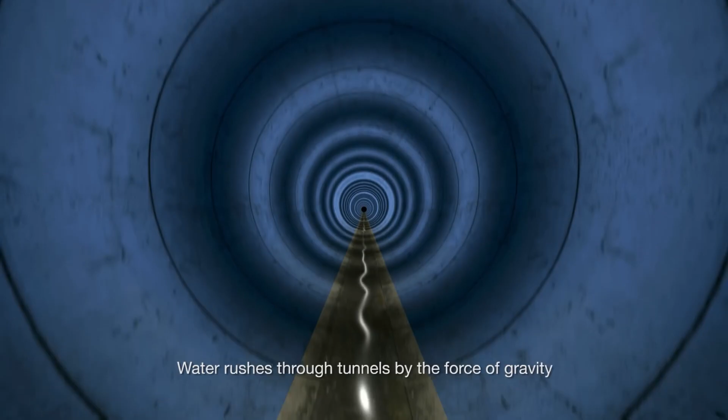The National Water Agency of Singapore (PUB) came up with the idea for the Deep Tunnel Sewerage System, DTSS, more than 20 years ago. It is a motorway for spent water that is vital to a small city-state with a growing urban population.

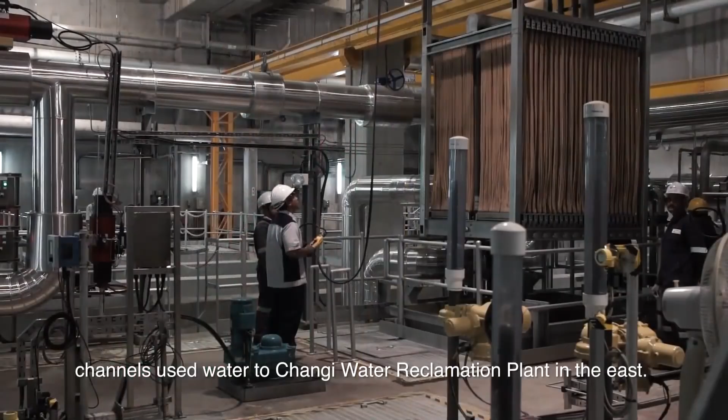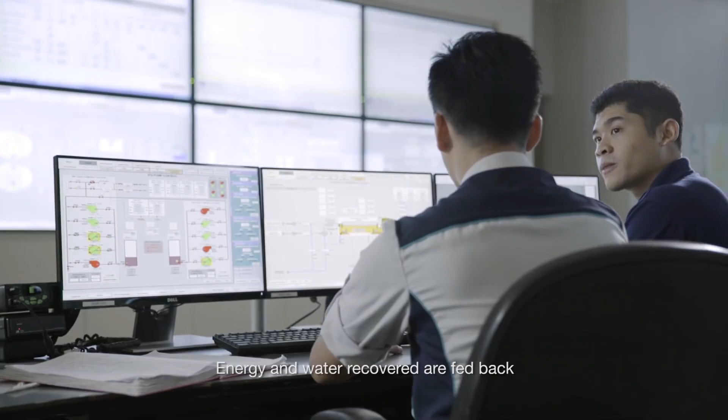In order to meet Singapore's long-term demands for used water collection, treatment, reclamation, and disposal, it captures water from residential blocks, commercial premises, and industrial estates and recycles it. With a network of tunnels, pipelines, water reclamation facilities, and ocean outfalls, Singapore's Deep Tunnel Sewerage System, DTSS, would entirely replace the sewerage infrastructure of the tiny island nation.

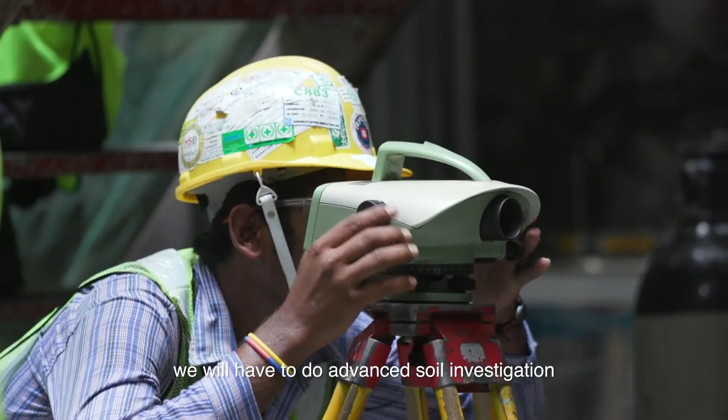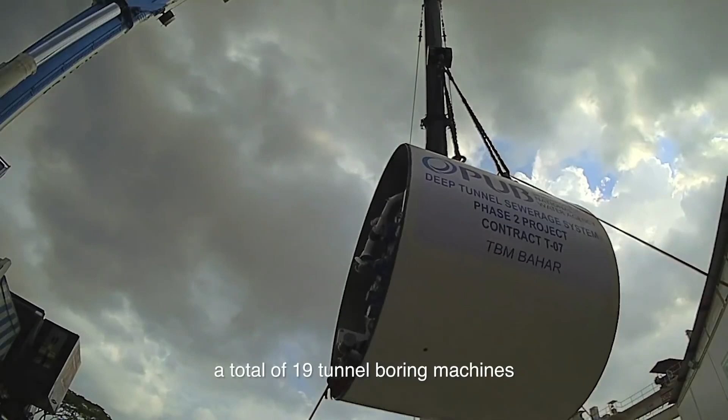The $3.65 billion DTSS, one of the most comprehensive wastewater management initiatives ever, will enable Singapore to accommodate an anticipated population expansion from 4.5 million to 5.5 million, reuse wastewater in useful ways, and rebuild land no longer required for sewerage works. WSP performed conceptual engineering, preliminary design, and program construction management services for the project on behalf of the Public Utilities Board (PUB) of Singapore.

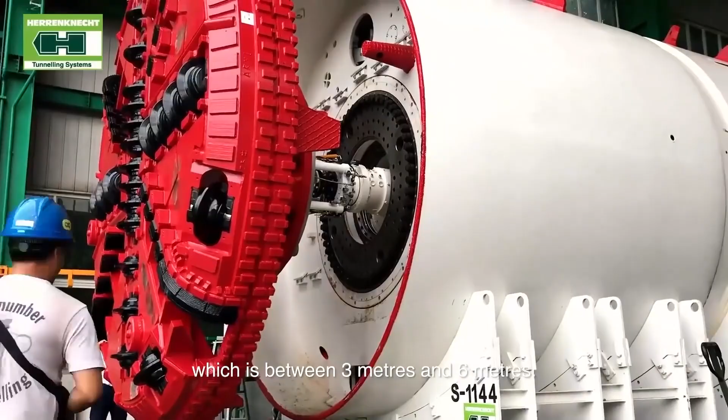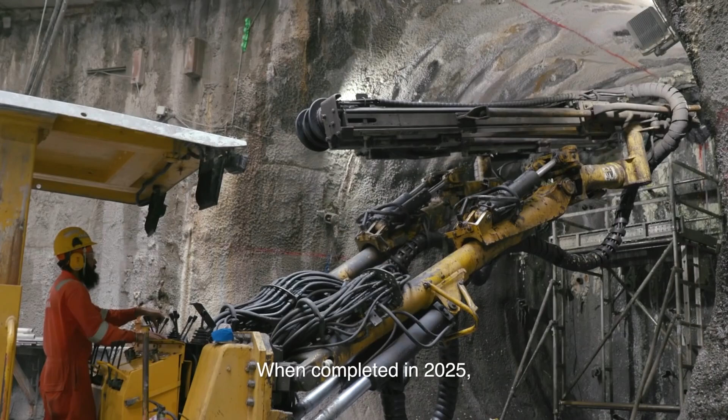The entire new wastewater infrastructure, including the north and south systems, was conceptually and formally designed by the joint venture. For the north system, which was finished in 2008, WSP provided program management for the construction of 30 miles, 48 kilometers, of tunnels completed under 6 design-build contracts involving 8 tunnel boring machines, contractors, and consultants from 11 countries, as well as assistance with tender documents for the design of the link sewers, the new Changi Water Reclamation Plant, and the Changi Outfall.

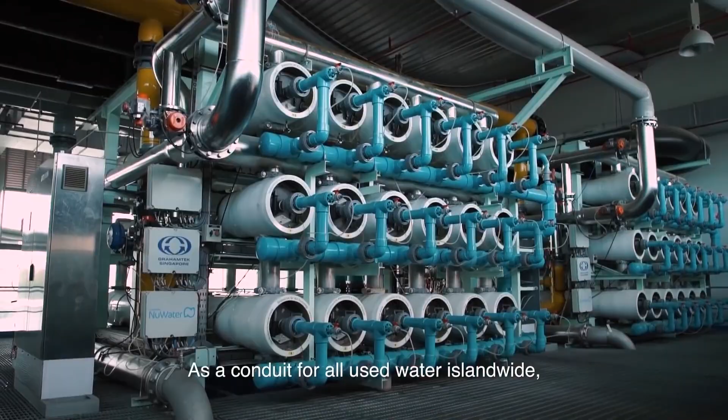The Public Utilities Board (PUB) in Singapore is developing the Deep Tunnel Sewerage System, DTSS, a sizable integrated project, to meet the island nation's long-term clean water needs through the collection, treatment, recycling, and disposal of used water from businesses, residences, and industries. An Outstanding Engineering Achievement Award from the Association of Southeast Asian Nations as well as a prestigious Engineering Achievement Award from the Institution of Engineers Singapore were also given to the project.

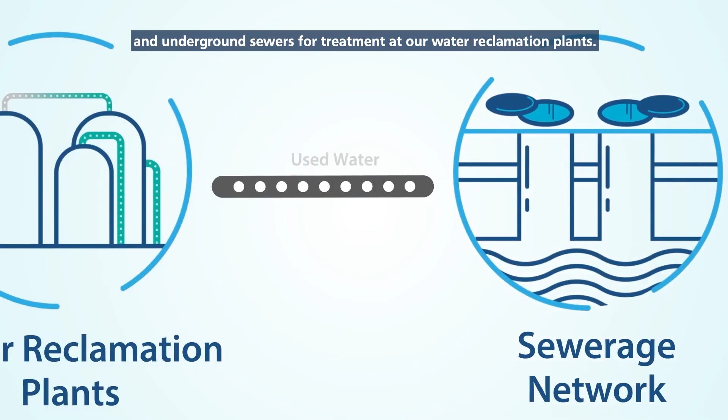There are 2 stages to the project's development. The second phase is expected to start in 2016 and end in 2022 after the first phase's construction was finished in 2008. To transport sewage to 3 centralized water reclamation plants, the project entails building 2 lengthy tunnels, each measuring 6.5 meters in diameter and 80 kilometers in length. These tunnels will be built roughly 50 meters below the surface.

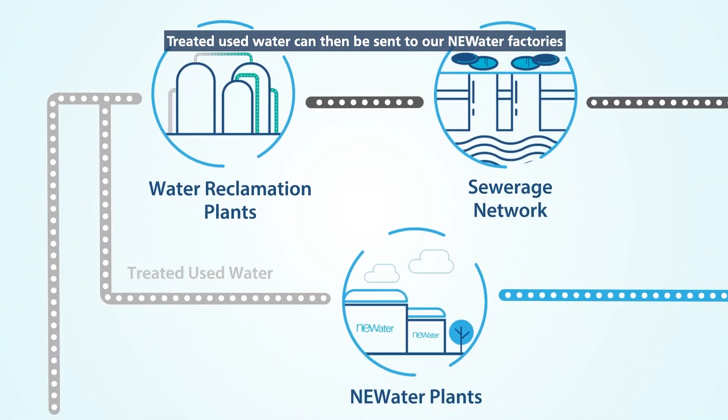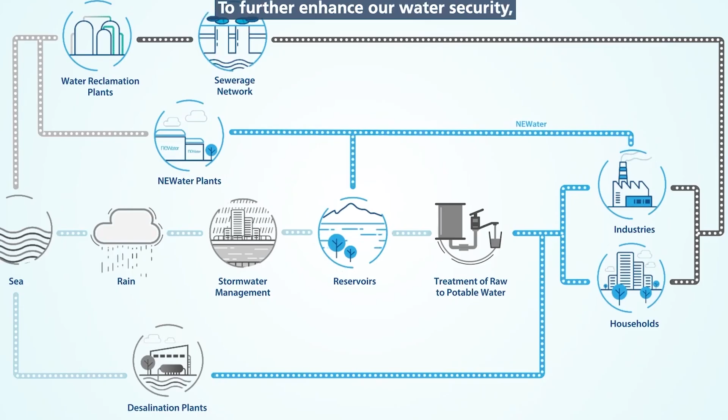The WRPs will process the sewage to create clean, premium reclaimed water that will be sold under the trade name NEWater. Through deep-sea outfall pipes, the treated wastewater will be released into the Singapore Strait. With a $2.70 billion investment, the first phase of the DTSS project was finished. It consists of a 48 km long deep tunnel system that directs water flows from existing gravity sewers to the Changi WRP in the east and the Kranji WRP in the north.

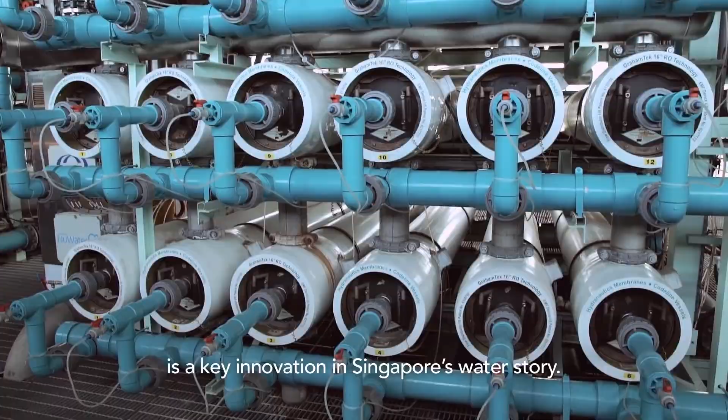The major components of DTSS Phase 2 are a cutting-edge NEWater factory in the new Tuas WRP. When finished, the NEWater facility at the Tuas WRP will supply 55% of the water needed in the area. The Tuas WRP's compact design will require fewer people and less energy. In order to generate less sludge and lower the cost of sludge disposal, advanced technology will be deployed.

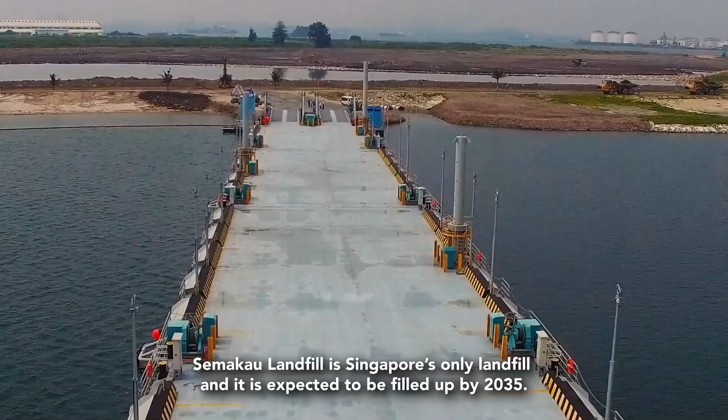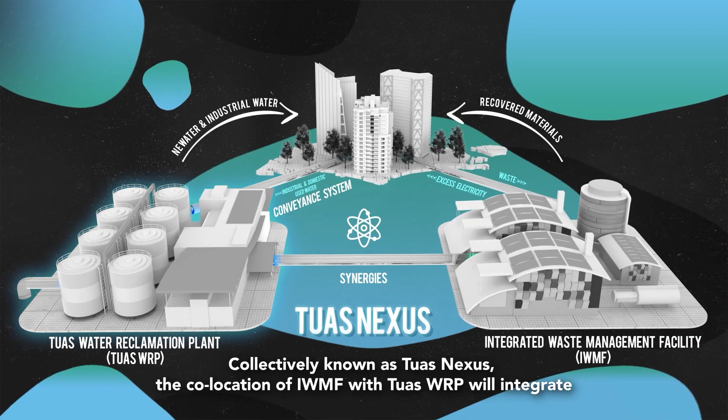In order to maximize energy and resource recovery, Singapore's National Environment Agency, NEA, will construct an integrated waste management facility, IWMF, at the Tuas WRP site. This facility will combine used water and solid waste treatments. The current Ulu Pandan and Jurong WRPs and intermediate pumping stations will be shut down after Phase 2 is finished, and the occupied areas will be cleared for new construction.

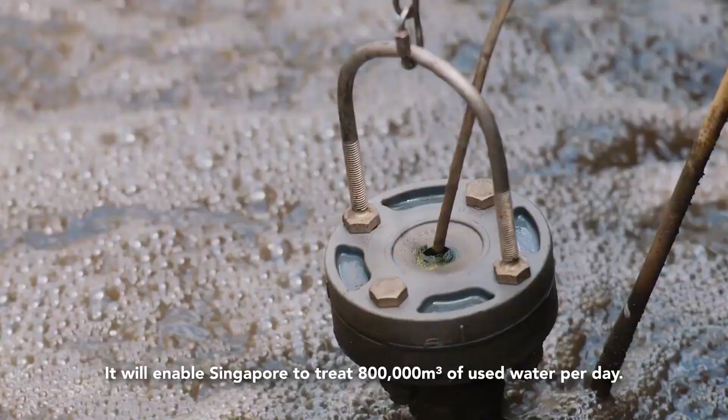The DTSS project intends to reduce the island's used water infrastructure by 50% while also enhancing Singapore's water delivery and treatment system. The acreage previously occupied by the WRPs and intermediate pumping stations was decreased from 300 hectares to 190 hectares with the completion of DTSS Phase 1. The land should be reduced to 150 hectares by Phase 2. The area that is freed up can then be utilized for other, more expensive developments. The project is also planned to recycle spent water effectively and with little harm to the environment. The Tuas WRP's NEWater facility will supply 55% of the water needed in the area.

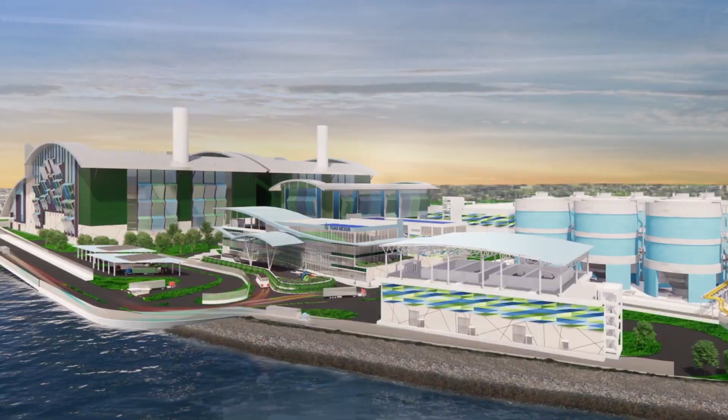The DTSS Phase 1's planning, design, and construction were conceptualized and managed by CH2M Hill and its joint venture partner Parsons Brinckerhoff. One of the tunnels included in DTSS Phase 1's development was given to Samsung Engineering and Construction. The TMCR Group, Ah Boon Civil Engineering and Building Contractor, Sembawang Engineers and Constructors, Penta Ocean Construction Company, KTP Consultants, and AKS Lining Systems were additional contractors for Phase 1.

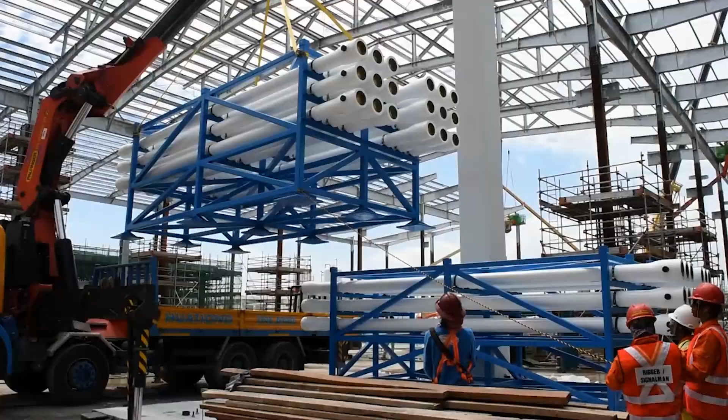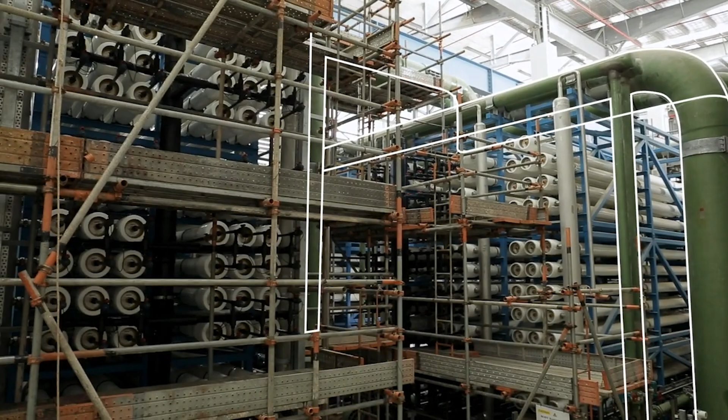The high-precision concrete tunnel lining for the project was provided by Hume Concrete Marketing, and the HDPE liners were purchased from Agru America. For DTSS Phase 1, Ho Lee Construction served as the plumbing and sanitary contractor. The Changi WRP received flow meters and transmitters from Yokogawa Engineering Asia and power and automation from ABB.

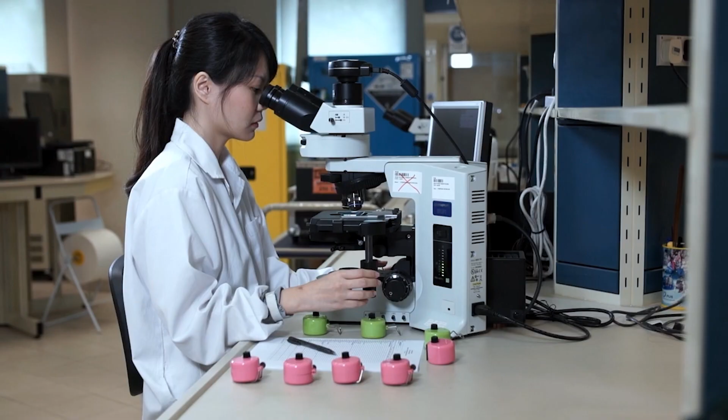A joint venture agreement between Black & Veatch, B&V, and AECOM and PUB was inked in June to offer engineering services for the DTSS project's second phase. The B&V AECOM joint venture is receiving assistance from Ramboll and KPMG for contract execution. The Public Utilities Board, PUB, of Singapore is creating the Deep Tunnel Sewerage System, DTSS, as part of a major water infrastructure project to help the nation's long-term clean water demands.

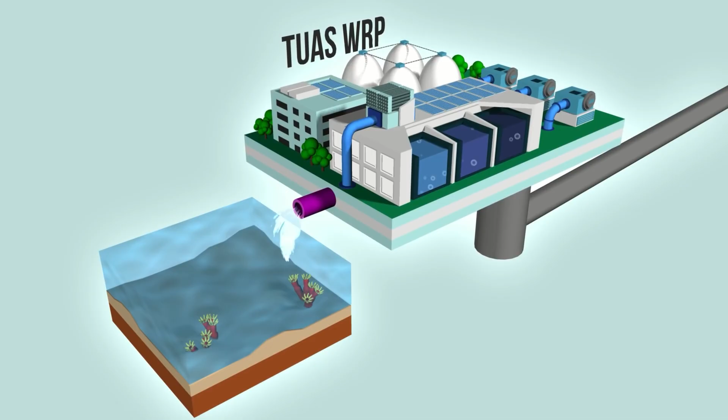To transport used water to 3 centralized water reclamation facilities, WRP, situated in coastal areas, DTSS constructs deep tunnels. The excess treated effluent is dumped to the sea through outfall pipelines after the used water has been cleaned and further purified into clean water to be distributed under the brand name NEWater.

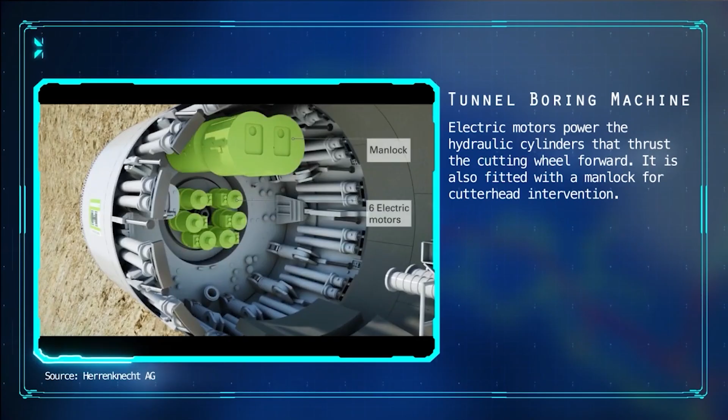The project entails the construction of 2 substantial tunnels, each measuring 6.5 meters in diameter and 80 kilometers in length, to transport sewage to 3 centralized wastewater treatment plants, WRPs. 2 phases make up the project's development.

In order to direct water flow from existing gravity sewers to the Changi WRP in the east and the Kranji WRP in the north, the first phase, which was finished in 2008, consists of a 48 km long deep tunnel system. Through a 30-kilometer south tunnel, 60 kilometers of linked sewers, the Tuas WRP, and a 12-kilometer deep water outfall, the second phase will extend the tunnel system to the west.

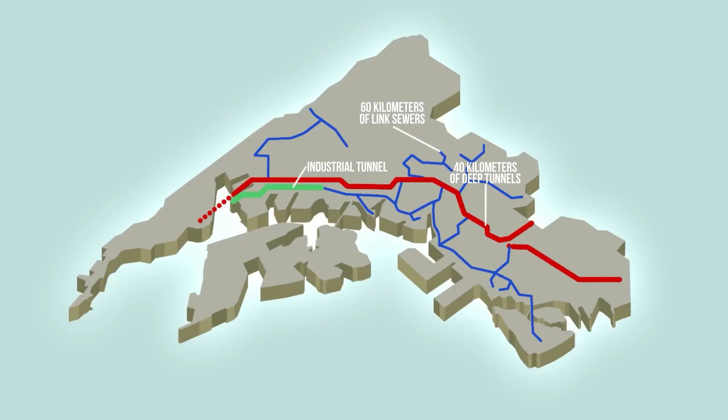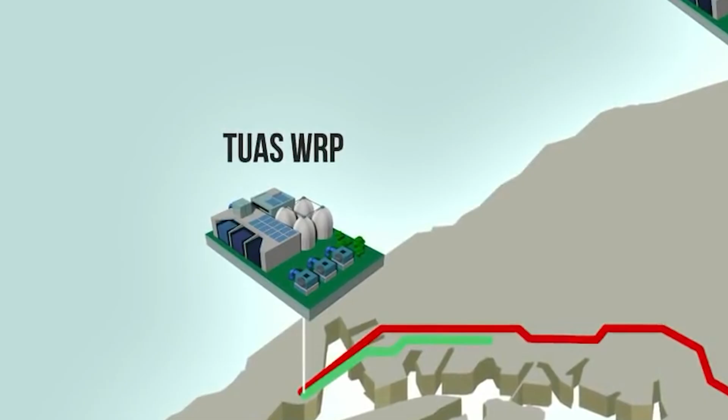For the second phase, Dextra provided 8 GFRP soft eyes for TBM breakthrough as well as 1,210 rock bolts for supporting the tunnel excavations. The NEWater facility at the Tuas WRP will supply 55% of Singapore's total water demand upon Phase 2's scheduled completion in 2022. The Tuas WRP will also process 800,000 cubic meters of used water each day, making it the biggest membrane bioreactor facility in the entire globe.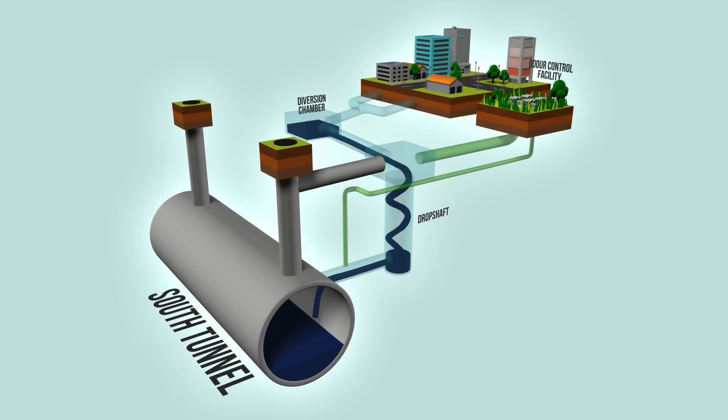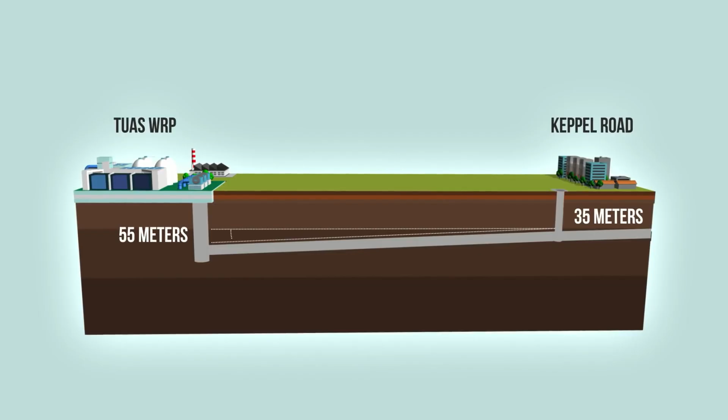Although many of the design requirements for the fully gravity-fed trunk sewer tunnels are fixed, the DTSS client team, which is a division of the Public Utilities Board, PUB, of the Singapore government, chose to award the construction contracts on a design-build basis, primarily to maximize the benefits of time savings, according to Chang Kok Meng, director of the PUB DTSS department. These big-diameter tunneling contracts represent a new undertaking for the PUB in terms of scope and size.

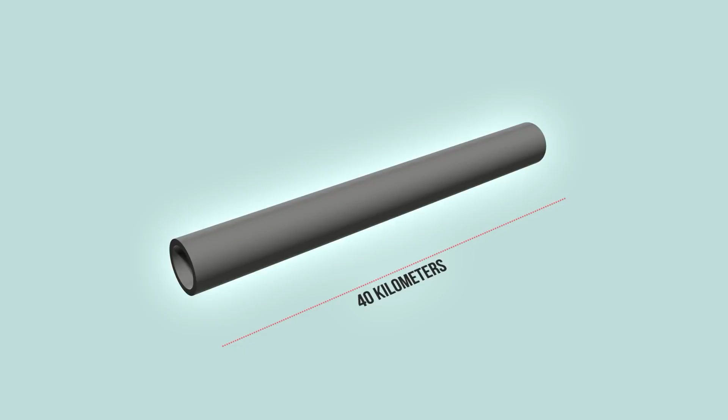Design, production, and delivery of the TBMs could proceed simultaneously with final design under the design-build model, reducing the entire project timetable by several months. The client has less direct engagement than would be available under traditional design-bid-build contracts, which is a drawback. Nevertheless, we were happy with the design-build process and will use it again in the future.

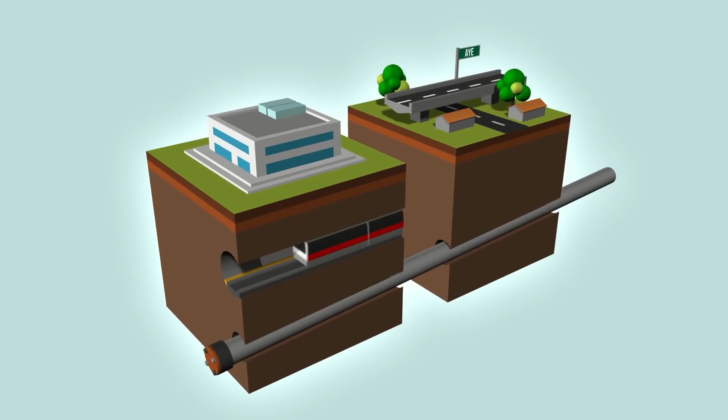The amount of maneuverability available to design-build contracting teams is constrained. The employment of some techniques, such as dewatering, is prohibited since the grade and alignment of the tunnels are fixed. According to Mrs. Ang, Deputy Director of the PUB DTSS Department, to eliminate the possibility of surface settlement, we mandated the use of positive closed-face slurry or EPB tunneling, and forbade dewatering without explicit consent.

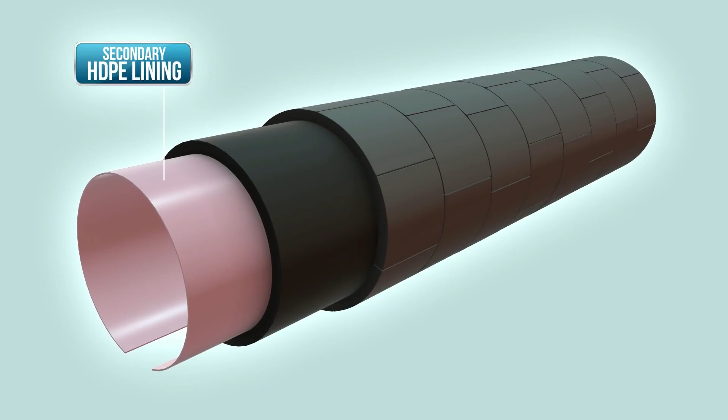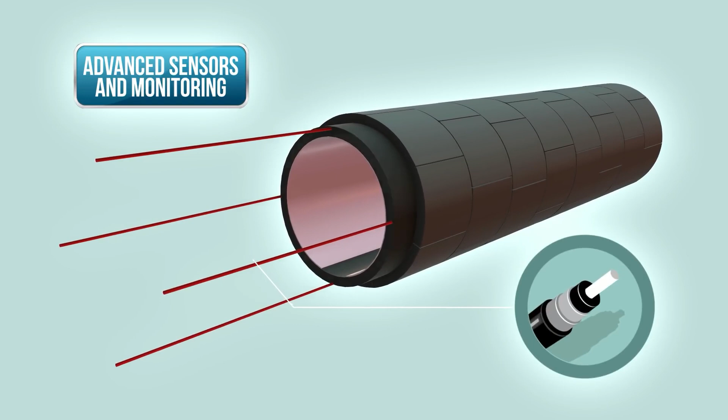In order to improve the design of the chosen TBMs, confirm their excavation techniques, and foresee conditions, we also required the design-build contractors to conduct additional site investigation borings, supplement the geological investigation data we provided during contract tender, and prepare their own geotechnical interpretive report. Additionally, and in every instance, contractors had to have an independent checker assess their designs before submitting them to us for evaluation and approval. The plan has, for the most part, been successful.

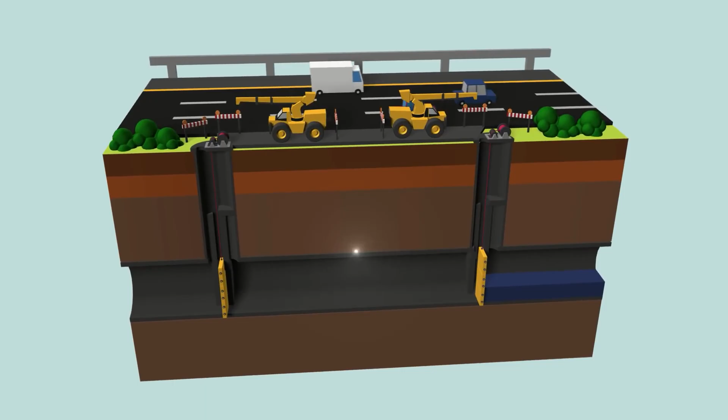By both Singaporean and worldwide standards, the incidences of surface settlement above such a considerable amount of tunneling, through terrain that is considered to be hazardous, and beneath critical surface transportation infrastructure have been few and have had little effect. The most significant ground loss occurrence to date occurred at a launch shaft when one of the TBMs was mining through the tunnel eye into the drive. It resulted in a face loss depression on a roadway around 40 meters above, which required nighttime road closure to fill the depression and make the road completely usable once more for morning rush hour.

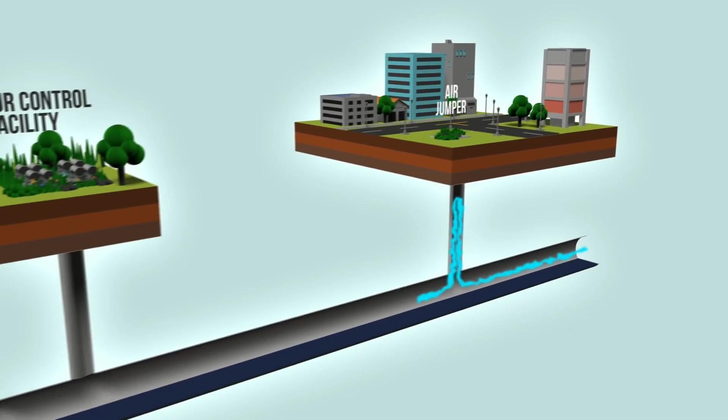Robert Marshall, project director for the CH2M, Parsons Brinckerhoff, PB, JV, stated, "We have had no additional big face loss occurrences and have not caused any serious settlement of either the roads or the MRT transit network, under which the DTSS tunnels pass numerous times. In order to prevent fatigue from the high thrust pressures utilized to pierce the rock and the high torque experienced in the soft and mixed face conditions, work has also been undertaken to reinforce the cutterhead support struts."

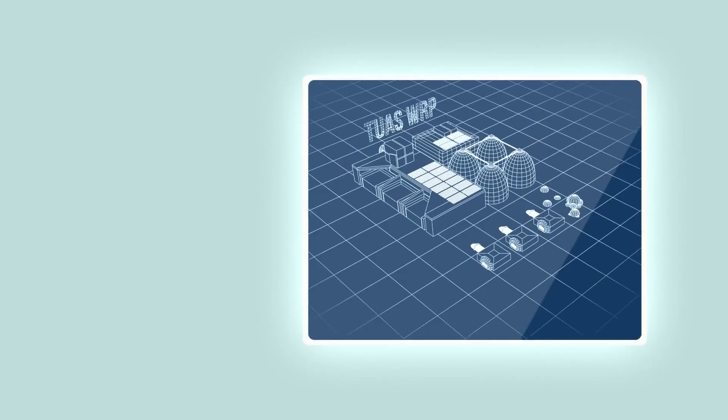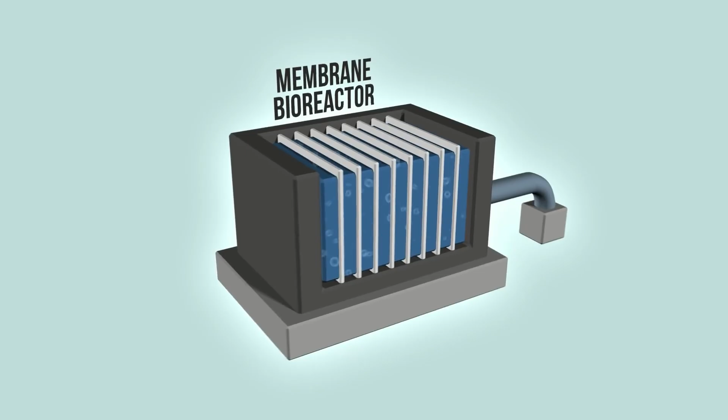Tae Ching Kiong, project manager for Sembcorp, stated, "We did not anticipate needing so frequent interventions at the start of the project. Additionally, we anticipated performing the majority of the interventions in areas with entire rock faces outside. The opposite has actually been true in practice." Between 10 and 12 bids were submitted for each of the DTSS design-build contracts in 1999 due to fierce international competition, which led to extremely low prices. Only a small number of the proposals submitted were more expensive than anticipated.

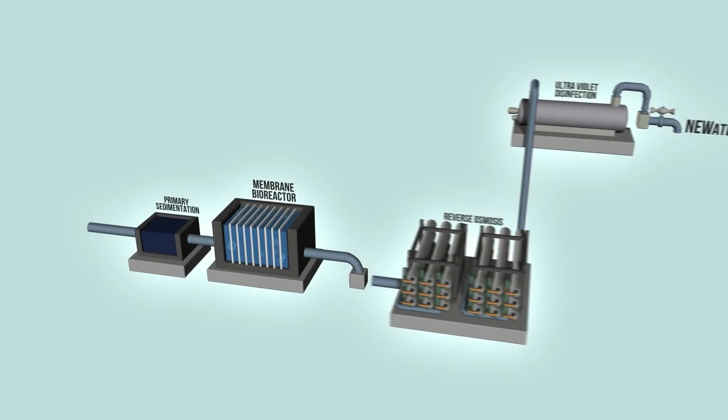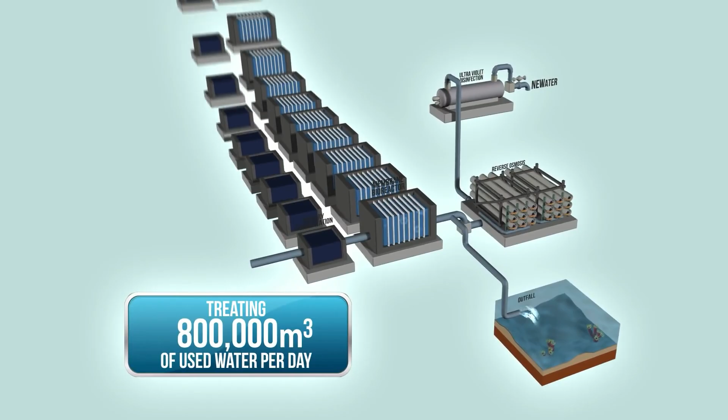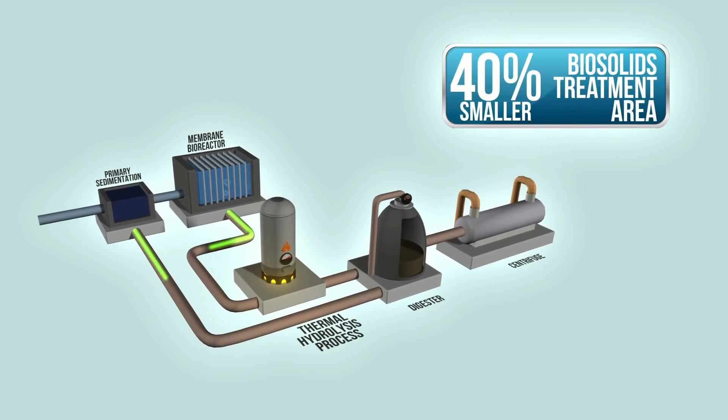The owner of the DTSS will have purchased a 48-kilometer system of large diameter, 100-year design life infrastructure under the design-build procurement technique after it is finished, at a total contract bid price cost of $329 million. This is part of a $2 billion project that also includes a new, high-capacity treatment facility and a 5 km long outfall made up of 2-3 m precast concrete pipes that were buried in seabed trenches off the island's southeastern shore.

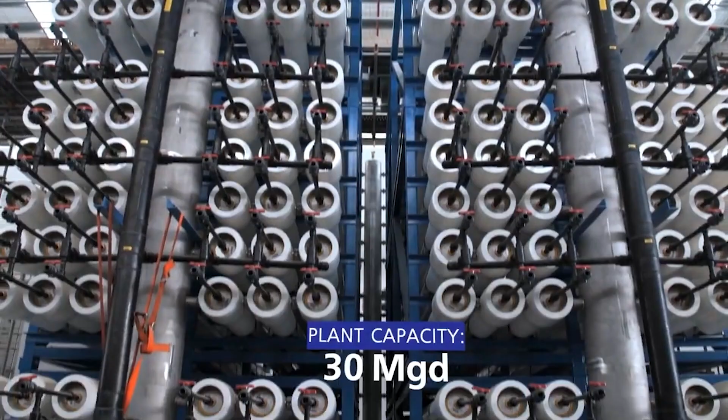On the southwest side of the island, Phase 2 of the DTSS consists of a second proposed network of deep-level tunnels and a third sizable treatment facility and outfall structure. It won't begin construction until well after 2015, long after the existing Phase 1 experiences have been consigned to Singapore's own unique tunneling history. So, this was all about the video today.